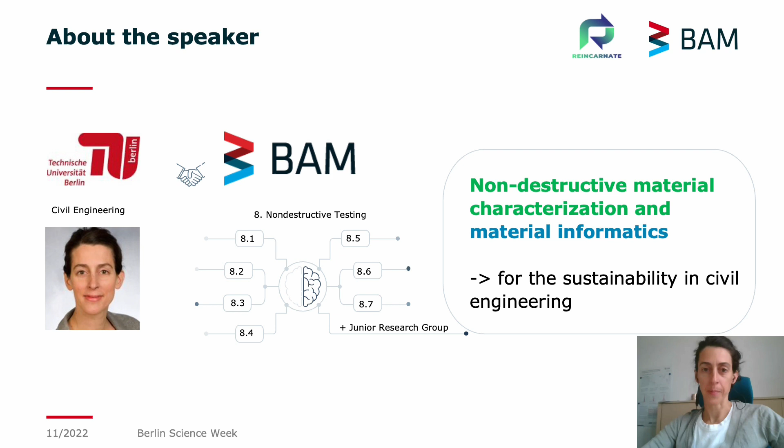I start off with a quiz, or rather question. Who knows the German overshooting day and knows when it was in the year 2022? Feel free to participate in the quiz. It is possible at any time and completely anonymous.

Let me explain what that actually is. The overshooting day is the day when the sustainably usable resources that our Earth, our ecosystems, can produce in 1 year are used up. That means it is the day we have put more carbon into the atmosphere than forests and oceans can absorb in 1 year. We have caught more fish, cut down more trees, harvested more, and used more water than the Earth and its ecosystems could reproduce in the same amount of time.

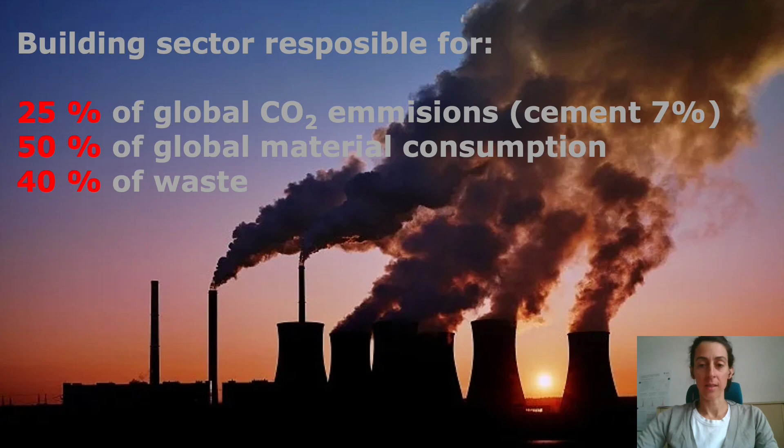Conclusion at this point. The World Is Not Enough makes a good movie for sure. In real life, however, we are heading for quite a catastrophe. And this is mainly due to the consumption of the major industrial nations. Less developed countries currently have a much smaller ecological footprint, but many of them are developing rapidly, and it is very clear that we all, and especially regions like Africa, India or China, which are growing rapidly, must rethink their resource-intensive key industries and make them more environmentally friendly in order to keep our planet livable for future generations. And we must understand this as a global challenge. After all, we all live on the same planet, and there's no planet B.

For sure, the global climate crisis and resource problems have been recognized and they are fought against by individuals and politicians. Ambitious national and international targets have been put in place, the Paris Climate Agreement, the EU taxonomy, and the aim for so many countries is to become climate neutral by 2050. The problems of the building materials sector are discussed in the press, like shown here, and in the society. There are countless magazine articles and the topic is widely broadcasted and discussed in television. But what is the right way to go now?

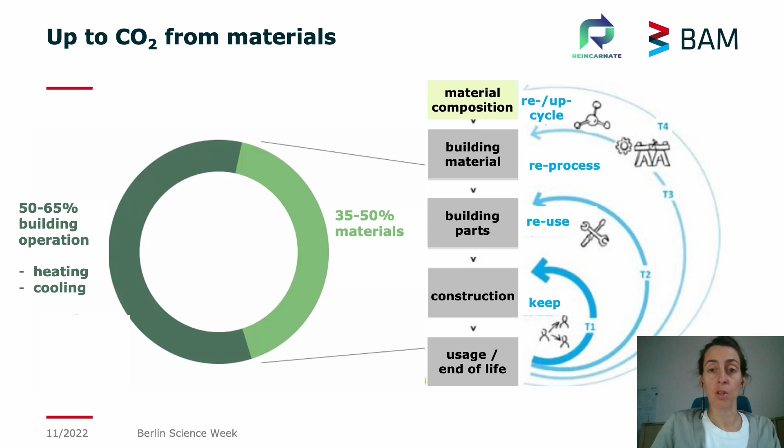And that exactly brings us to the goals and mission of the Reincarnate project. This is a European research project, so let's take another look at some numbers on this level. The average lifespan of a building in Europe is only 25 to 30 years, and the main reason for demolition is obsolescence. This is why there's a large amount of construction and demolition wastes, representing approximately 25 to 30% of all the waste in Europe.

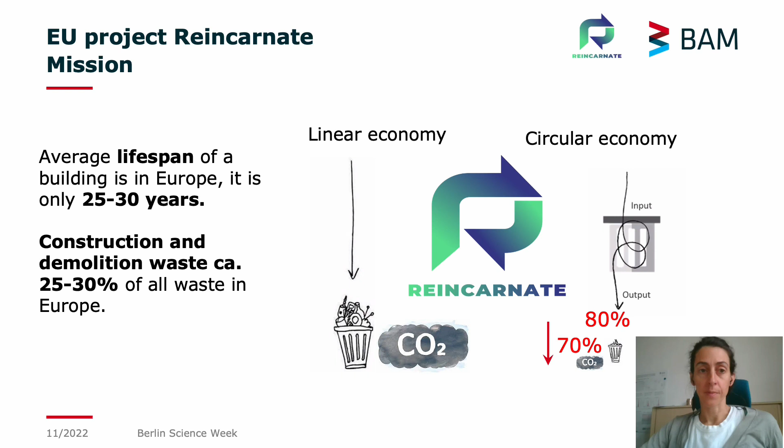The mission of Reincarnate is really to anchor the idea of the circular economy, the cradle-to-cradle concept in the European construction industry, and to significantly extend the life cycle of buildings, construction products, and materials through innovative solutions. This would reduce construction waste by 80% and the CO2 footprint in the construction sector by 70%. Reincarnate brings together 16 multidisciplinary organizations from 8 countries, including industrial companies, universities, non-profit organizations, and research institutes such as BAM.

I think you all have noticed. We currently have 3 big mismatches in the building sector when we aim towards a circular economy. First, the demand increases globally for building material, while the natural resources diminish. At the same time, the building and construction wastes are rising, but this can be thought of as a material stock actually, and the math is that about 80% of the material we will need for the next 50 years of construction are already built. But right now, we even pay money to deposit this resource.

Second, the quality mismatch. We typically have increasing quality requirements while our building stock is constantly decaying. Third, the information mismatch. We don't have any information at all where the materials are in our urban building stock and what their condition is. There is no information platform really for people who want to reuse the material and help prevent the waste from piling up.

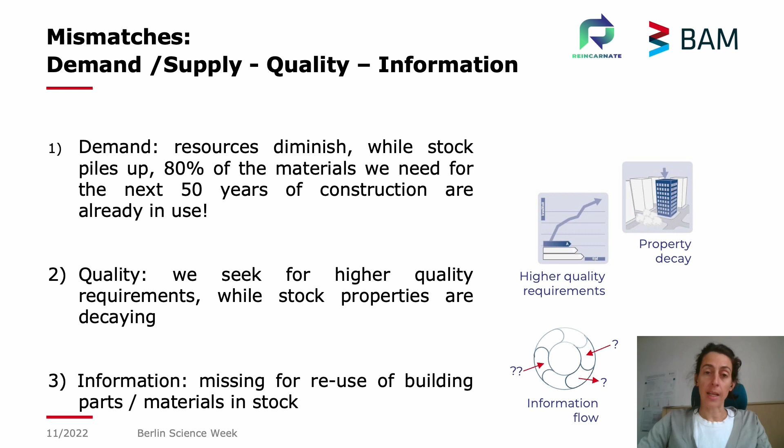So let me explain these mismatches and the lack of information with a very easy to understand story. Let's think of this little fish living happily in his newly built house. But after some 30 to 40 years, he feels like something is wrong. After this time, he feels like the house is too tiny, its quality has degraded, or he simply has new requirements to feel well in it.

So, what does that mean? We have a building, a fishbowl, or a building part, which decays in quality over time. If it does not fit anymore the requirements that it was intended for, we can assess it and refurbish it, for example, by adding or replacing parts. Like in this little figure here, well, the inhabitant maybe has changed or some parts of the building have changed to make it fit our actual requirements.

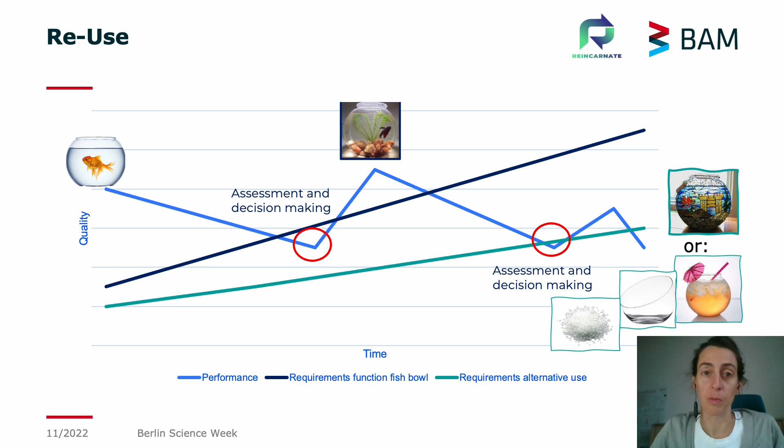And this is the very core of Reincarnate. The core is a circular potential information model. And here we are developing an information system pretty much like a building information model, but with a strong focus on the circular potential of the components that allows us an evaluation of a building's circular potential, the reincarnation of a building.

We call it CPIM. It will allow us to store and capture all required data to understand the potential to extend the lifetime of a building, its building components and materials, and to find optimal reuse possibilities for each of its elements. It will also enable us to trace construction products and materials across different buildings, waste management steps, and construction sites. So basically, it will really establish all the necessary connections to important information, data, and agencies involved for reuse.

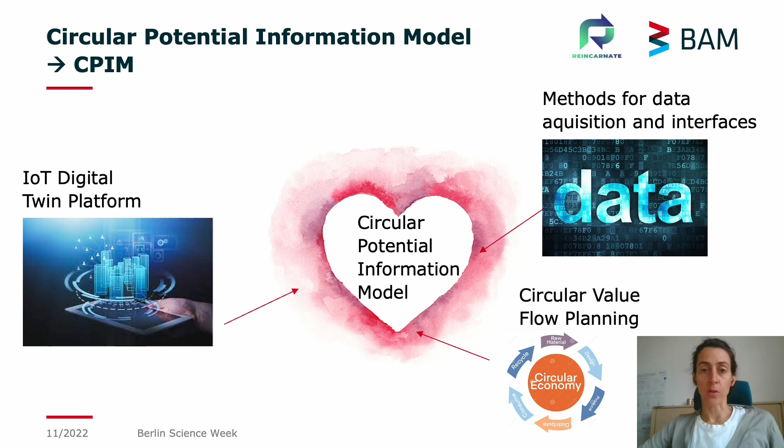It is complex, of course, but look, it will, for example, consist of a digital twin platform, an interface to feed data from objects and other tools to do case-specific circular value flow planning. We have 10 key innovations encompassing digital tools for materials and waste tracing, automated solutions for deconstruction and waste separation, cross-sectorial communication, and the value assessment of recycled materials.

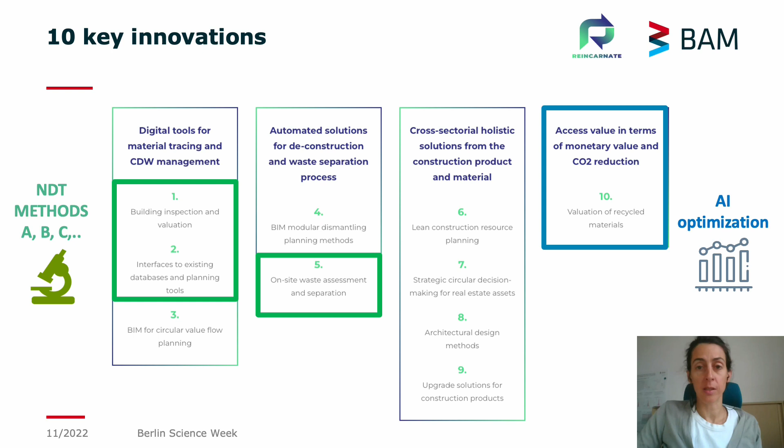Here you see how we add new and valuable information to CPIM with non-destructive testing methods. We carry out these methods either on-site directly, on the building part, or after taking cores in relevant and representative areas of it. Which means we can also measure in the lab and then feed the information. We can just work with one tool or use a combination of methods and then combine as much complementary information as we have, like usage, position, known damages, history, adaptations made, there's so many you can add, and feed all this into one joint database in order to establish successful condition assessment and life cycle predictions.

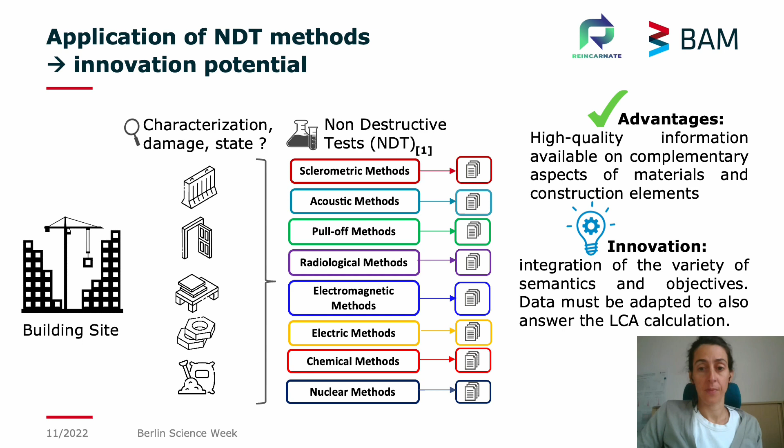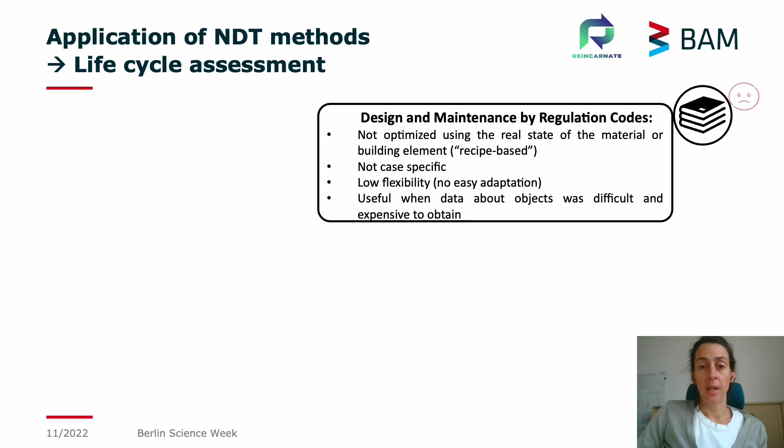Formerly, we just relied on design and maintenance by regulation codes, which were not optimized or case-specific, had low flexibility, and basically relied on rather general calculations considering high safety margins. The benefit of using now actual acquisition data and case-specific information, plus the possibility to reassess and monitor building parts or materials, feeding the information into digital twins, leads to a more meaningful customized life cycle assessment and helps potential reusers to identify and choose the components and parts they actually can work with in their new projects.

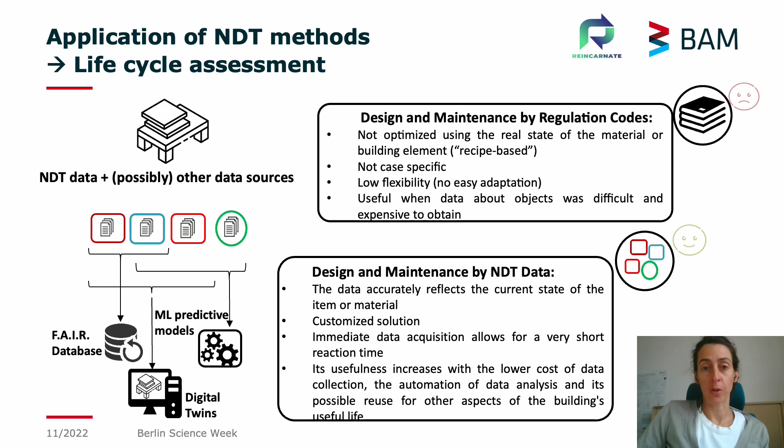But like I said a few slides earlier, we also contribute to the key innovations of Reincarnate by adding some self-written AI to the project, artificial intelligence. We work with our SLAMD software here and add to the valuation of recycled materials by assessing and feeding data of recycled materials to it and then assessing their relevance and reusability in terms of material properties, but also monetary value and, for example, CO2 reduction potential.

By the way, if you're interested in learning more about this approach and what else can be done with it, please see the talk of Christoph Völker and me, Developing Sustainable Concretes with AI, here also at the Berlin Science Week 2022.

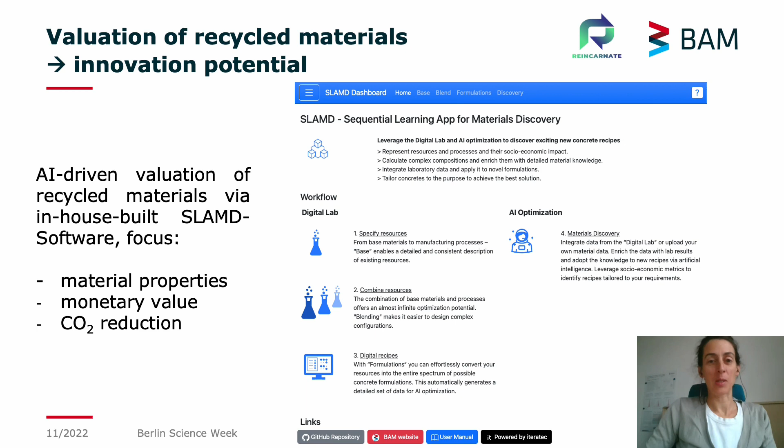Last but not least, Reincarnate is dedicated to demonstrating its innovations on real-world projects as well. To this end, 10 demonstration cases across Europe have been identified that will allow us to strongly demonstrate the Reincarnate methods and technologies on single construction renovation projects, within integrated business chains of contractors, real estate companies and developers. And here you see objects which were selected and how diverse they are. We encompass, for example, university and office buildings, tiny houses, a hospital, and even a wastewater treatment plant. You can imagine how different the relevant information and reuser profiles possibly are.

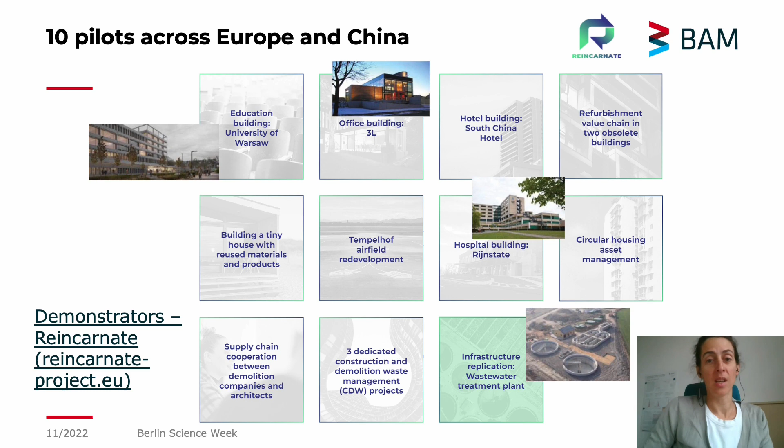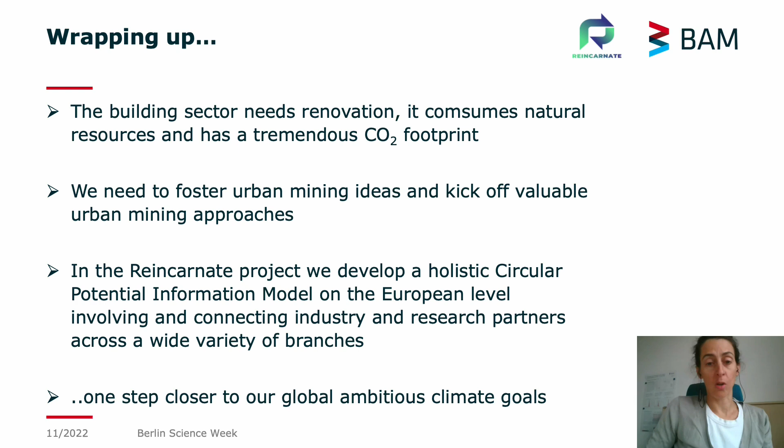Wrapping it up, what are the takeaway messages? The building sector needs renovation. It consumes natural resources and has a tremendous CO2 footprint. We need to foster urban mining ideas and kick off valuable urban mining approaches. In the Reincarnate project, we develop a holistic circular potential information model on the European level, involving and connecting industry and research partners across a wide variety of branches. And we hope to bring us all one step closer to our global, ambitious climate goals.